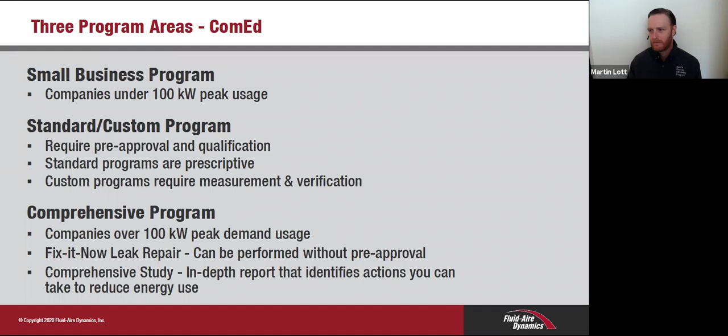So while the incentive rates are lower, the variable speed drive savings are much higher for this type of program, typically because the compressor horsepowers are a lot larger. So when we start getting into 75, 100, 125s, running 3 shifts, a variable speed drive running at 50% could be delivering upwards of $15,000 to $20,000 in annual savings. So it's a great program. It's even greater to have a variable speed drive implemented on your compressed air system. Just to touch briefly on the dryers that you spoke about, a typical refrigerated type dryer is non-cycling, especially up to 200 CFM.

When we get above 200 CFM, we have a couple options available to us, including thermal mass type, which is usually an ice or a cold water or cold glycol bath, or in some instances, a mass such as a sand or aluminum block. And then there's, recently come on the market, variable speed drive type dryers, which I'm a big fan of because the refrigeration circuit is very simple.

Okay, but the other advantage for the end user is it holds a very consistent dew point. We're able to manage and maintain that dew point as close to freezing point as possible, which delivers drier air to the compressed air user. When we're talking about cycling and VFD, just like with a rotary screw compressor, there's less wear. So rather than constantly running the refrigeration compressor, we're either cycling it off or slowing down the speed at which it runs. So you get the longevity factor as well as a rebate from ComEd for implementing.

So that's very good. Thank you for that overview, Martin. So now rolling on to the comprehensive, get a bit more broad in what we can do. If we can deliver savings, we will get paid by ComEd for delivering those kWh savings at a rate currently, I believe, at 12 cents. Is that right, Henock? Correct. And I think the only requirement to be eligible for the comprehensive program in comparison to the small businesses is any customer that's greater than 100 kW peak demand use.

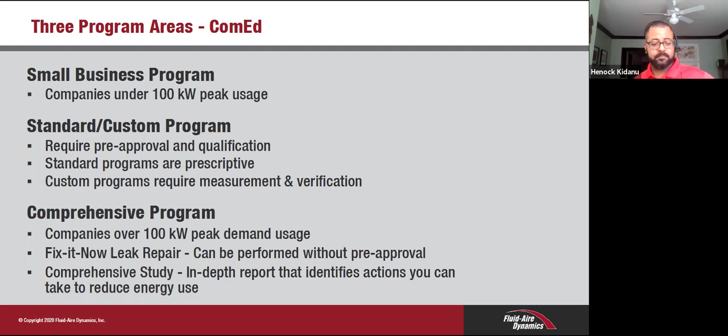Just to share a case study, there was a project in Wood Dale, sheet metal former, and they had inherited a 150 horsepower compressor from the previous building owner, and he thought it was a heck of a deal. And I'm sure it was if he had sold that compressor the day that he had acquired it. So what I mean by that is we came in, I did it as a complimentary sort of service, just pop some data loggers on for a few days, and I got an overview of how his compressed air system was operating. And what I found is that this large 150 horsepower compressor was running at about a 10 or 15% load. Well, the savings on it were close to $42,000 a year. So what seemed like a big bargain wasn't so much.

In short, we put in 2 40 horsepower compressors, one mostly as a redundant to the other. Did serve a very short-term high load demand for their oven. But the customer made me go with a 40 after my recommendation of going with 2 20s, just because he believed that my calculations were wrong. We put in those 40s and they run below 30% load a majority of the time. Had he not done that, for a couple of years he would have still been burning through $40,000 a year in wasted energy. And his ROI on that system, I believe, was about 1.1 years. It completely paid for the whole system through his energy savings. So that was an incredible success story that I thought I'd share with the audience here today.

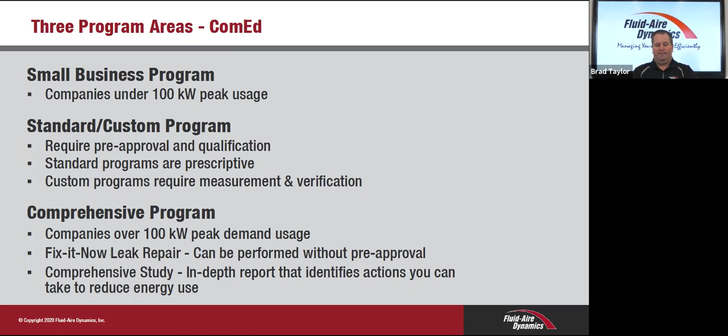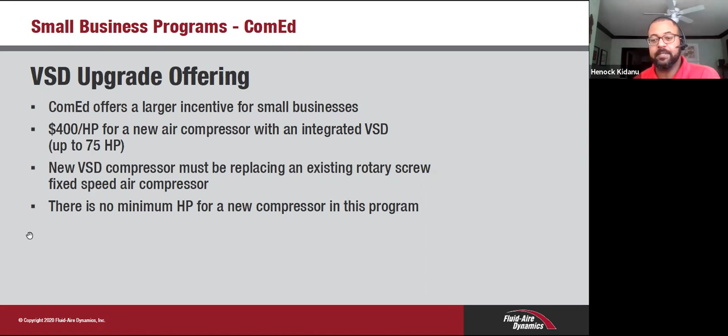All right, anything else you'd like to say, Henock or Martin? No, I know we're going through the slides shortly. It looks like we covered a lot during that first kind of go around, but I know the details for each program are kind of in those follow-up slides. So I'm sure we can kind of touch on those bullet points as well. Yeah, sure.

So as we've reviewed the small business program here, $400 per horsepower. And again, you must have an existing fixed speed rotary screw compressor.

There is a maximum horsepower of 75 related to the program, but there's no minimum. Although typically most rotary screws start at about 15 horsepower, so typically we see applications starting there.

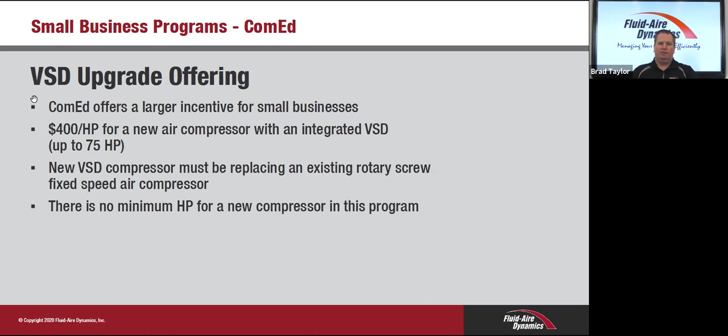And then of course they have the other segments relating to zero loss drain valves and leak repair as well. There is a nozzle offering that they have. I think they pay $5 for energy efficient nozzles, which includes blowguns. So if you have leaky blowguns that don't have an energy efficient tip or just have a 5/16 copper tube on the end, it might be worth it to look at replacing those.

Hey, Brad, this is Mike. We've got the slides here that we can work through that'll get you to those different topics. So this is the second part of the small business on the VSD Upgrade Offering, and then we can move on to the standard and custom programs that bring in all of that content there.

Okay, very good. Another stipulation is you must have your fixed speed rotary screw compressor installed for at least a month, which is typically not a challenge for any of our users taking advantage of this program. And this is the same program that incentivizes lighting or refrigeration. Again, as long as you're under that 0 to 100 kW, you can apply for all these different incentives. All right, rolling on.

Go ahead, Henock. I'm sorry, Martin, go ahead.

Yeah, so this is a listing of some of the prescriptive incentives that are available for these equipment upgrades or purchases. A couple thoughts on the process here, and if you're working through Fluid-Aire, I'm sure they're going to guide you right here. But the important thing to remember is, as you're considering, say, purchasing a new air compressor, it's important that we get this application submitted before you issue a PO.

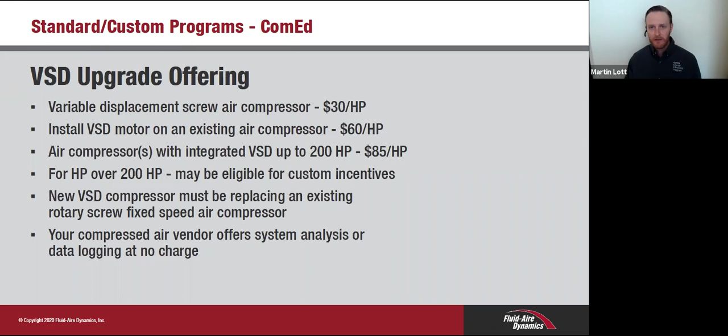And then likewise, here's a breakout of the standard incentives on refrigerated dryers. As Brad said, that variable speed refrigerated air dryer, that's a real winner in my mind. And then also if you're adding storage or receiver capacity for your compressed air system on load/no load systems, we'll give you $1.50 per gallon on a new storage tank.

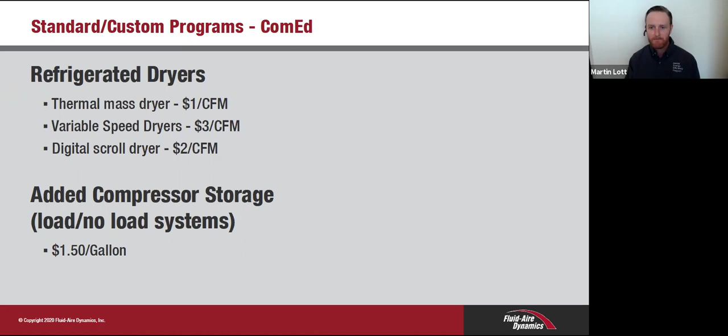Yeah, and I could step in here. As I described earlier, the two segments of the comprehensive approach, or what we call officially the industrial systems program. Like I said, the first one is the fix it now. It's the easy, cost-effective leak repair option, but it goes above and beyond leak repairs. But everybody knows it for its quick fix, very important energy measure implementation.

So what the program offers is $6 per horsepower, which is paid directly to the service provider, as well as up to $120 per leak identified and repaired. The benefit there is there's not much effort on your part as a customer because that incentive goes directly to the service provider. So all that's really needed is for Fluid-Aire to come in, identify the number of leaks you have, fix those leaks, and all the paperwork and documentation comes from them, and we pay Fluid-Aire directly.

Anything that's above $120 per leak, say for example some of the leaks identified are difficult to repair, that might increase the cost, that would be invoiced from Fluid-Aire directly. But as part of the program, we pay up to $120 to the service provider directly. Next.

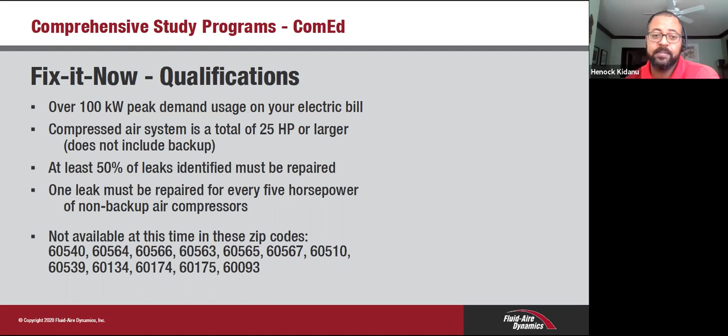As you can see, there are zip codes listed under here. The only customers who are eligible are those who fall under ComEd's territory. These are certain zip codes that don't fall under that. I believe Naperville has its own utility company, so they don't fall under ComEd. So if you fall under these zip codes, you may not be eligible for this offering. Next.

Easiest way to participate really is just to identify if you're eligible because you have a greater kWh than 100, a greater peak demand of kW than 100. And then contact your vendor, contact Fluid-Aire, have them come and do the walkthrough and identify the leak potential and savings, and they do pretty much most of the work after that.

A very generous program, and you guys are hearing it direct from the top. This is a legit program, and it is very simple. Very simple. A couple signatures, we do all the paperwork.

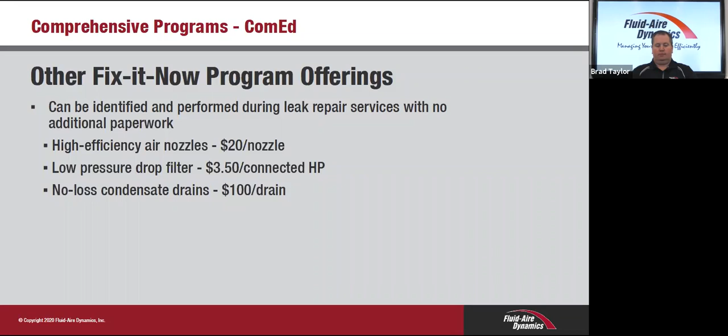In addition to those leak repairs, there's other energy efficiency opportunities that you're able to get incentives for as well. That's high efficiency air nozzles, low pressure drop filters, no loss condensate drains. These are all opportunities in addition to that leak repair. So once Fluid-Aire does that initial walkthrough, they keep their eye open for other opportunities that you guys can repair and get savings from. And again, this incentive goes directly to the service provider, so there's really no cost to you as a customer.

And then to transition into the industrial study, we use that Fix It Now as a step in the door for service providers to really look into other opportunities outside of just the standard Fix It Now measures. And if they're able to identify those measures, essentially they develop a comprehensive report as part of the investigation phase. They work with you to implement those measures. And then they also do a post-analysis as part of the verification phase.

And then after the work is completed and those verified savings are confirmed, you as a customer are eligible to receive 12 cents per kilowatt hour saved. So the service provider is getting paid directly from ComEd for the study, and there's also the customer incentive that goes directly to you as a customer. As part of that data logging, there's at least 2 weeks for the pre and post.

And there is a commitment as part of the study of at least $15,000. But the catch there is you're not paying for the study. Essentially, you're committing to $15,000 of the recommended measures that you plan on implementing into your facilities, so you're getting the benefit out of those savings. Now, I just want to put a grain of salt that if $15,000 isn't identified as part of that study, you're not required to implement it. It's just really for ComEd to encourage you to move forward with the measures that were identified as part of that study. So I did want to throw that caveat in there.

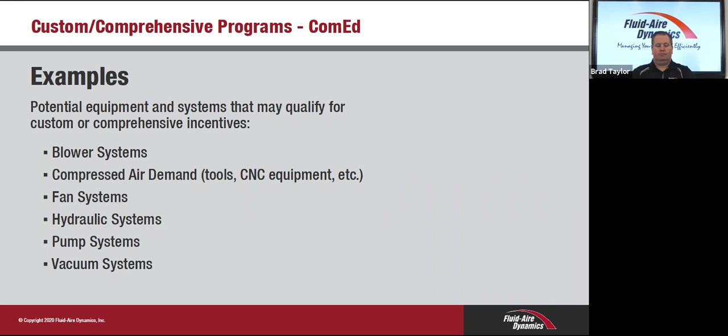And then these are other examples as part of a comprehensive approach to your facility. Blower systems, compressed air demand, obviously the tools involved, fan systems, hydraulic systems, pumps, and vacuums are common points of view or measures that service providers and professionals look at as ways to improve your system's performance and reduce your energy use.

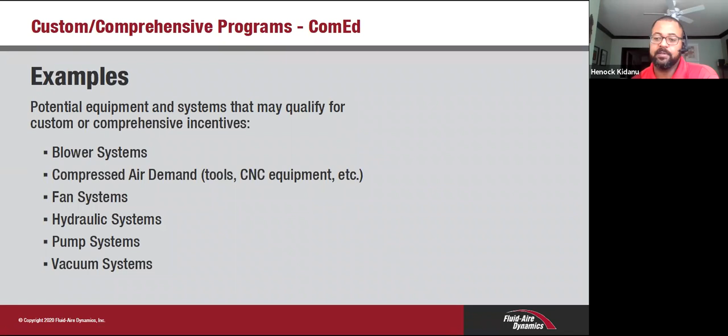Thank you very much for that, Henock. Yeah, we've got time for questions and answers, guys. We don't have any on the board at this point, but Brad, maybe you could just wrap that up and bring some of your perspective into what the guys just shared.

Yeah, just what Henock was reviewing on the comprehensive study side. Often what Fluid-Aire will do is just a little preliminary study like we had done for that Wooddale project. Just a few days of information to get a snapshot into what the savings could be before we go into a full 2-week logging. So that's something we offer. The other point I'd like to make is that you don't know what you don't measure, right?

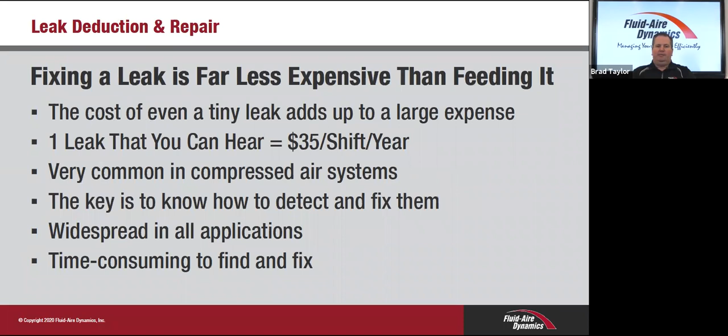I recommend doing a study, even a basic baseline study, at least once a year, because your processes change, right? Just look at what's happened with this whole COVID crisis. Our production lines have, in many cases, shut down or we're under limited production. Well, it's likely if we have multiple compressors that the pressure settings or the way we have them sequenced needs to be changed. And that's what a study will show us in a graphical view, is how those changes should be made.

Another component to that, and we're just in a testing phase of it now, is continuous monitoring. So our tagline is you won't continuously know what you don't continuously measure. And that has a lot of other advantages to it beyond just energy efficiency and leak rate, but it can help us be predictive in any shutdowns that could potentially be happening with the compressor, such as over temperature, which many of you compressed air users know is the issue about 90% of the time. When we have a shutdown, it's temperature related, whether it's low on oil or a plugged cooler or a thermostat. So this could help us prevent those shutdowns before they happen. So those are my 2 cents.

Yeah, and I'd like to add to that as well. As Brad, you mentioned continuous monitoring. We've actually launched an additional program incentive offering where based on the savings you're able to achieve by installing an equipment monitoring system, you're able to get additional incentives as well, in addition to the leak repair that you choose to move forward with. So you're able to get those incentives off the bat from just identifying, repairing those leaks, and then also throughout the year on a quarterly basis get incentives based on the increased improvement of your facility based on monitoring devices. So it's a brand new program for ComEd.

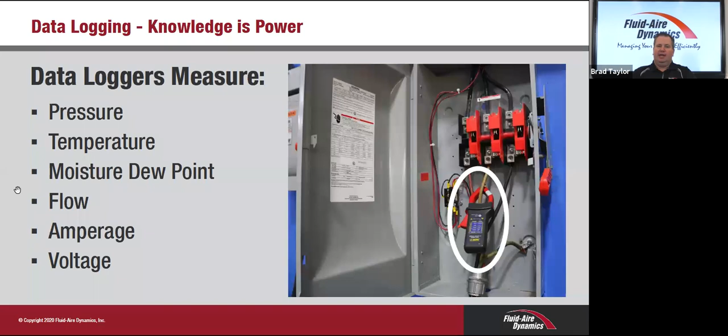They'll pay for the monitoring device. It's a little bit more complex than what you see in the photo here, but it gives a very useful tool for any compressed air user to have at his fingertips on his phone, desktop, a glance of what's going on with their compressed air system. So reach out, we can provide more information in that regard.

Well, that's all I have, Mike. Do you have any closing comments?

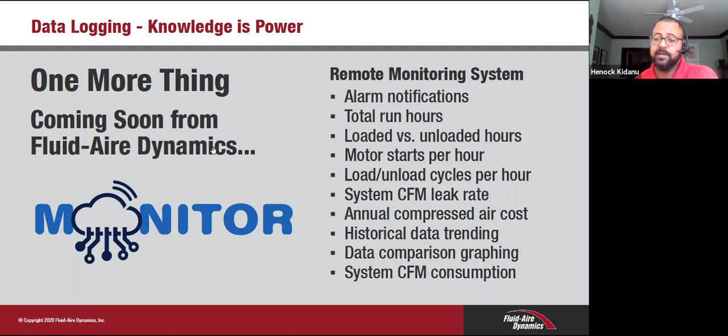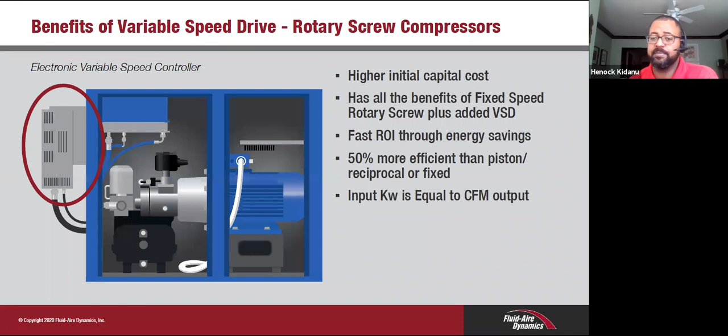I guess another thing I wanted to add too was you mentioned the other offerings or equipment types that the program touches on, whether it be industrial refrigeration, process cooling, compressed air. As part of the industrial programs, when you're working with a service provider, they come into your facility. Fluid-Aire would focus on compressed air systems, but they also work in a closed network of other professionals. So if they feel like there's other opportunities outside of the compressed air equipment that you have at your facility, they bring those opportunities to us as a program, and we look to bring in other professionals to provide their expertise on ways to improve in addition to the services that compressed air vendors or Fluid-Aire provides. And that's good.

We often hear that in regards to the lighting. When I tell them it's the same program as the lighting, oh yeah, we did that. We had great success. The guys were very helpful and we saw immediate savings. Guys, it comes from the same pot. Yep. Yeah, and just to build on that further, pretty much any change or upgrade you're considering, even if you don't think there's an energy element to it, it might be worth just bringing us in and we'll take a look, and there might be incentive dollars we can provide you for that.

These incentive dollars really come from you. You're paying into these incentive programs through your bill each and every month. And I think this is a way for you to reclaim those dollars that you've paid in. So let's look for every possible opportunity for you to get these incentives. Yeah, I hesitate telling people it's free money. I tell them it's their money that they pay in monthly into these programs. Right. Exactly. Recapture them, like you said, Martin. That's good.